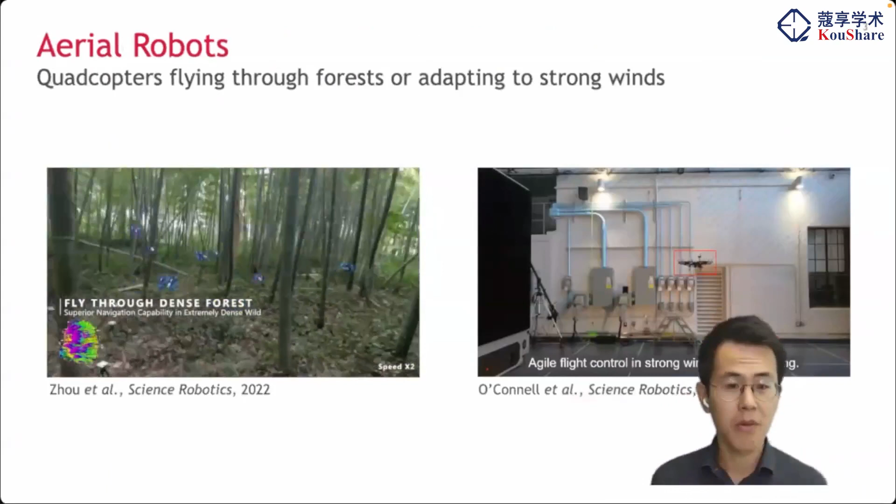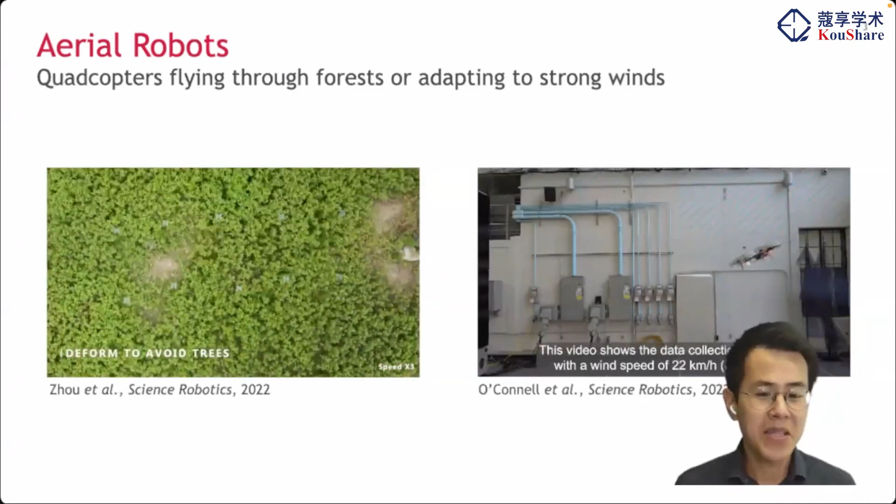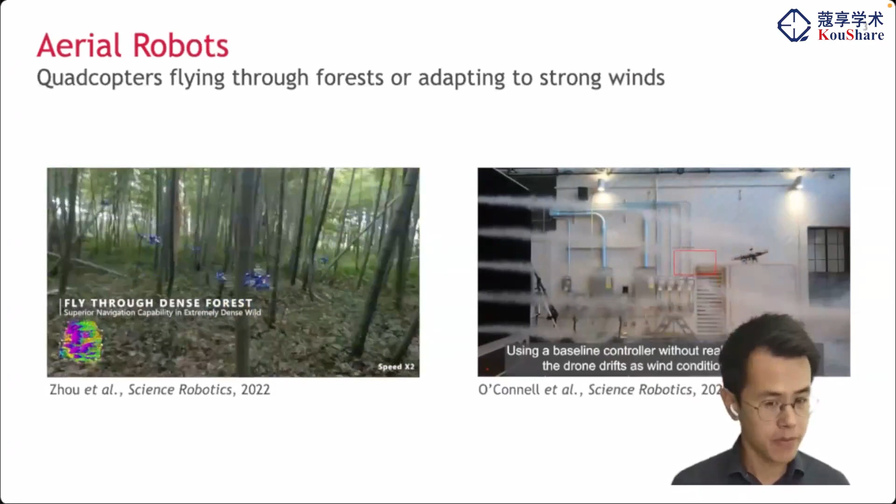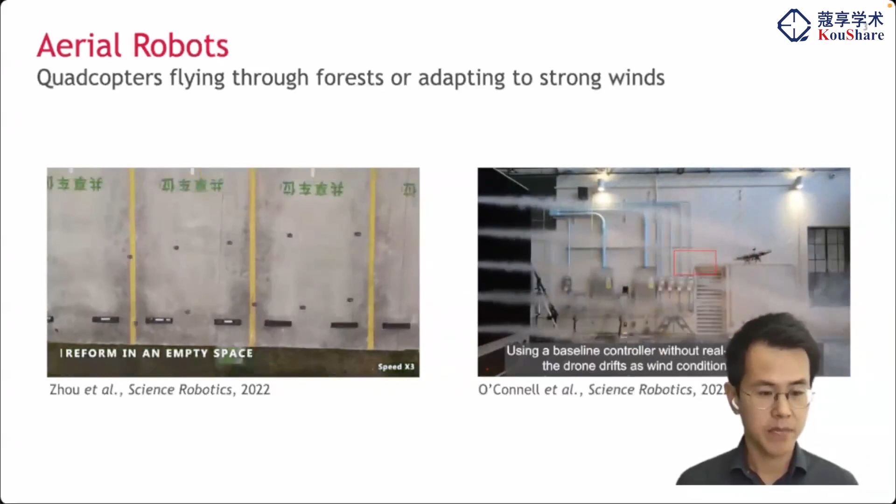Talking about small flying robots, people would typically think of drones or quadrotors, and there are 2 amazing videos here. These robots are basically in the order of a couple hundred grams, with 4 propellers. They're simple in structure, but come with exceptional maneuverability. They can fly and do acrobatic movements, work in swarms flying through dense forest, or learn to fly despite very turbulent disturbances. The capabilities here are state of the art, it's amazing.

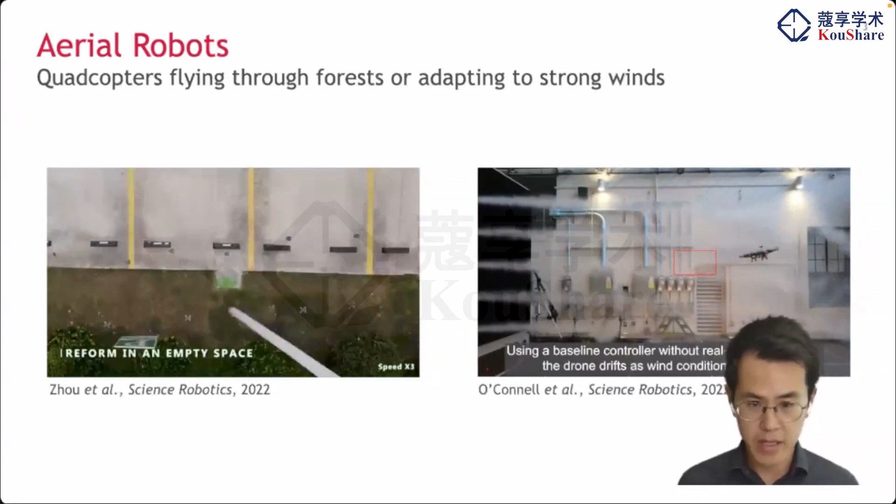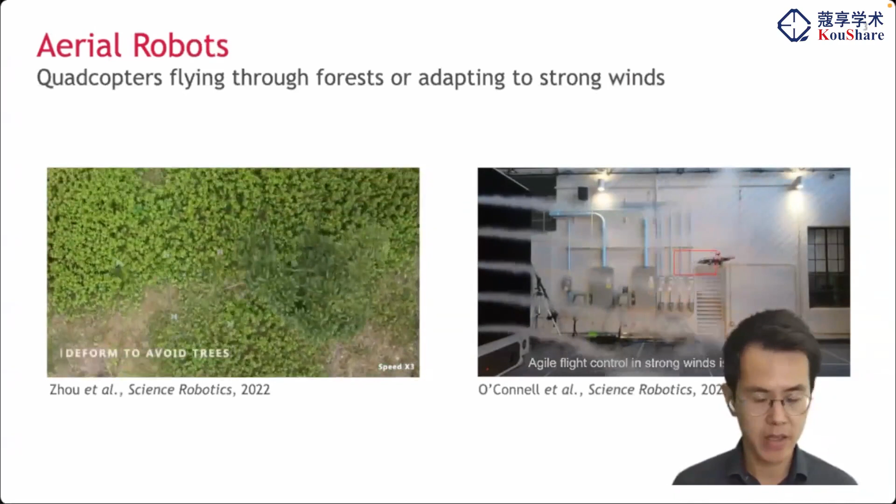But what enables this? It's enabled by intelligence, for example the deep learning algorithms that allow the robot to see, sense, and build a map of its surroundings so it doesn't crash into obstacles. It's also enabled by hardware components: they carry companion computers capable of doing millions of simultaneous computations at any instance, and they also carry cameras and LiDAR sensors for sensing the surrounding environment in real time.

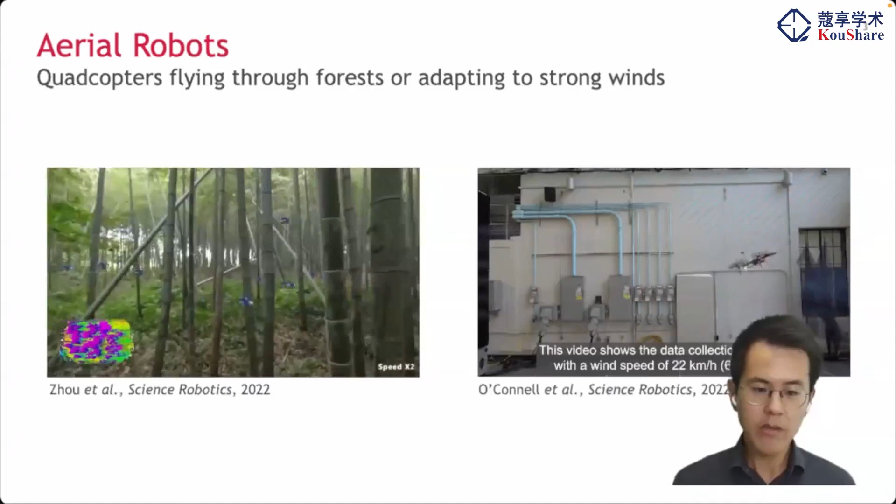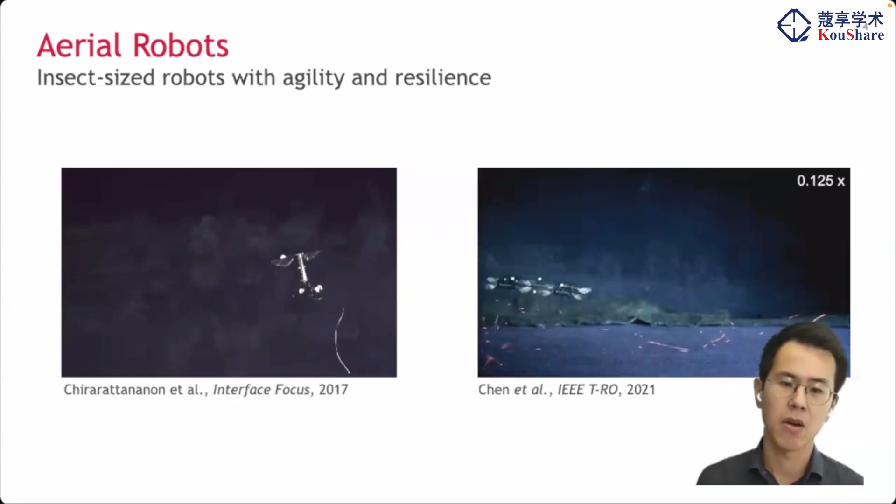Or when it collides with the floor, it doesn't give any destructive damages, right? That comes with the scale. So the reason you see the style differences, the contrast between these two kinds of robots, is actually the size or the scale.

And it comes down to physics of scaling, right? The physics of scaling makes flight actually at small scale much more difficult than at larger scale. Though even at larger scale, flight is already difficult because flying is very expensive, meaning you need to use a lot of energy to create lift and stay aloft in the air.

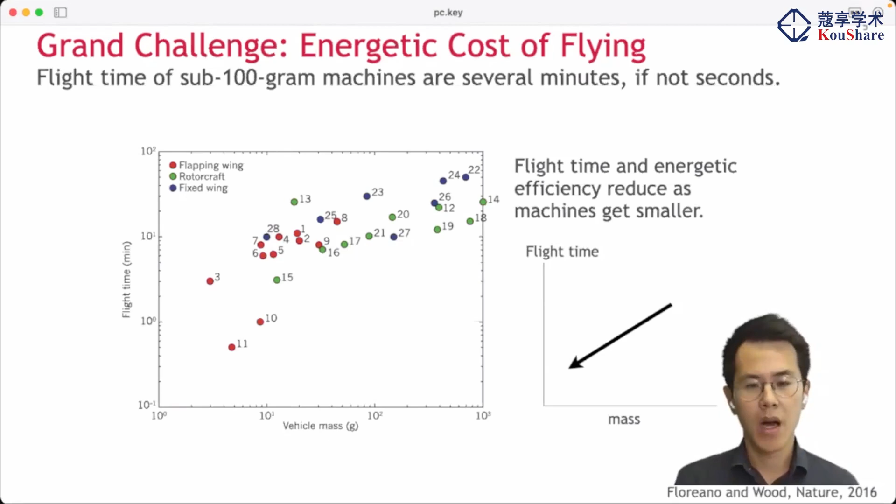So if you look at this plot, I took this from a review paper from Nature in 2016. The plot shows flight times of aerial robots across different scales, from about 10 grams to 1 kilogram. And the trend is very clear: as the mass of the robot gets smaller, the flight time becomes shorter and shorter. This is actually in a log scale, so the effect is very prominent, very pronounced.

Now at smaller scale, it's very difficult to fly. You cannot have much flight time because you cannot generate enough lift, you cannot carry more payload. This is why those small flapping wing robots cannot actually have a battery on board, cannot carry anything, because it's still very difficult to fly them since they're not very efficient.

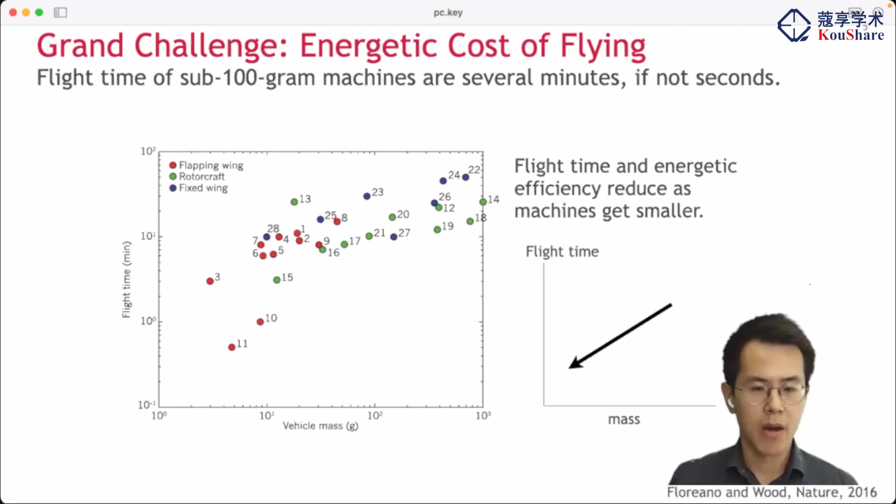So the reason for the effect of scaling can be explained fundamentally from the characteristics of the fluids. Flying is about aerodynamics, about the movement of air, or of the flow. Flight is attained by pushing the air downwards such that the normal force gives you lift, and that keeps the robot in the air. So it's all about aerodynamics, all about flow.

One particular metric that distinguishes aerodynamic flow properties at larger and small scale is Reynolds number. If you've taken a fluid dynamics course, or you're a mechanical engineer or physicist, you'd know that Reynolds number is actually a ratio that captures the importance of inertial forces over viscous forces. The inertial forces I'm talking about is mass times acceleration, and viscous forces is air drag, frictional forces.

It turns out that flow at smaller scale, or low Reynolds numbers, is dominated by viscous forces. So at a smaller scale we have low Reynolds numbers, because the importance of viscous forces becomes the dominant factor over inertial forces, meaning a big proportion of energy is lost in the flow in terms of heat or other losses. This makes flying at small scale difficult, and this is the underlying reason.

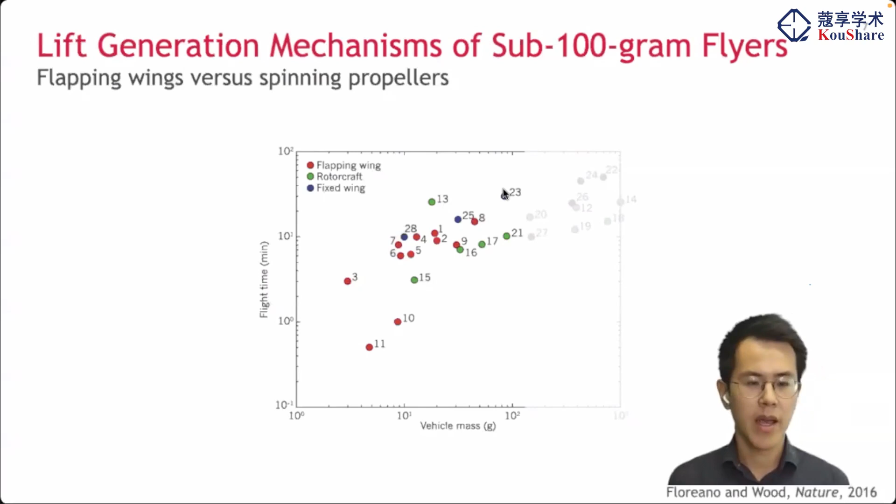I can look at them a little bit more closely and group them as rotorcraft, here in the order of say 30 to 50 grams, and also flapping wing robots. These come from sub-gram size, which is not fully autonomous, to 20 or 30 grams, which is autonomous. What's very obvious here is that flapping wing robots sit on top of rotorcraft, meaning they have longer flight time than rotorcraft when we compare vehicles at the same mass.

One thing you want to notice is also the size. Despite having the same mass, the same weight, for example a rotorcraft that is 30 grams might have a vehicle span of about 10 centimeters, but a flapping wing robot that is about 20 or 30 grams might be about 30 or 40 centimeters in span. So these are two different things, coming from different propulsion mechanisms as you can see.

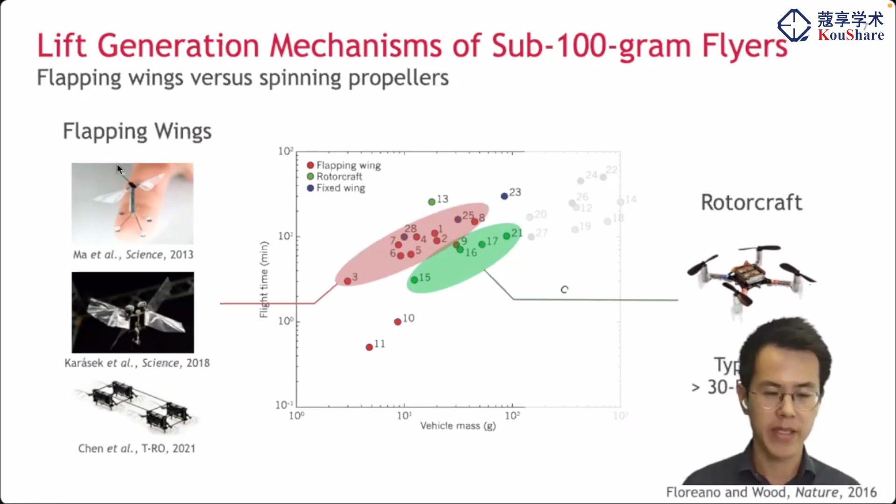So in order to understand this, it comes down to two things. The main differences are due to two reasons: the first is called unsteady aerodynamics, and the second is called disc loading. First, I'm going to talk about unsteady aerodynamics - what does it mean?

So a mechanism for lift generation of flapping wings is created by flapping the wing back and forth, as you can see in the video. This is the mechanism used by insects, and maybe birds, but birds are a little bit different.

So in 1999, Dickinson and Sanjay Sane published a paper about using a scaled up dynamic model to make a huge flapping wing, flapping it not in air but in some liquid to match the Reynolds number, and study the force generated by flapping wings. They found something very interesting, and I'm not going to go into the details, but let me give you some examples.

When we look at regular fixed wing aircraft or propeller blades, the propellers or the wing, sometimes called airfoils, operate going through the air at a very shallow, small angle of attack, meaning the angle between the wing and the moving direction is actually small, on the order of 10 to 20 degrees. On the other hand, when the flapping wing goes through the air, the angle of the wing with respect to the motion is huge, between 45 to 90 degrees even.

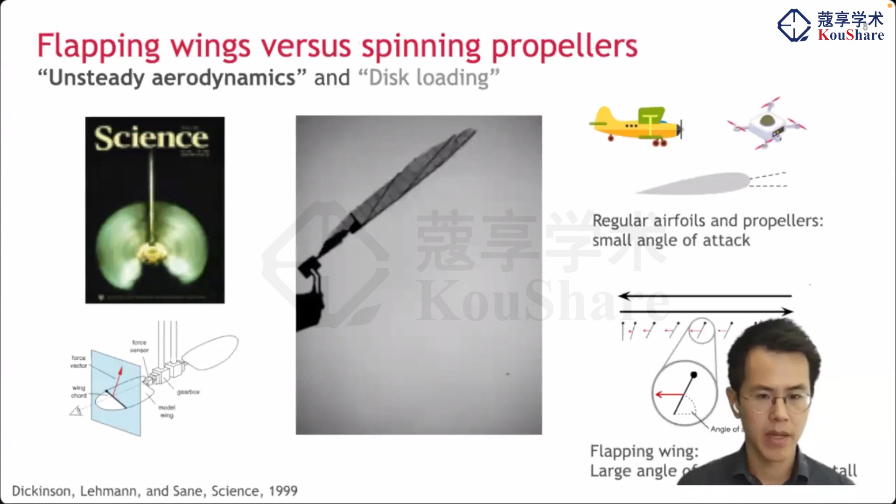Another thing I mentioned is disk loading. If I want to explain what it is and why it matters, I have to first define something called power loading. Power loading is a ratio of lift to power, so it's a direct metric for efficiency. High power loading means you need lower power to generate the same amount of lift, so high power loading means you are more efficient in actually generating lift.

Now according to momentum theory, which is a very simplified theory that can be used to describe flapping wings, propellers, spinning wings, and everything - however it's also a little bit simplified so it doesn't include the scaling effect - you can use this to compare different lift generation mechanisms at the same scale, meaning the same magnitude of lift, for example. According to momentum theory, power loading is proportional to the inverse of the square root of disk loading. Disk loading is the size of the wing or propeller, the area of the wing or propeller - it's the lift relative to the size of the wing.

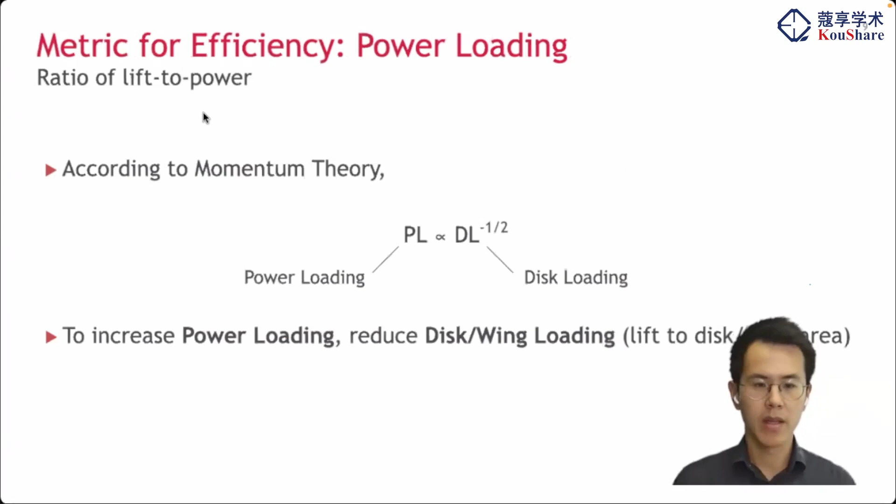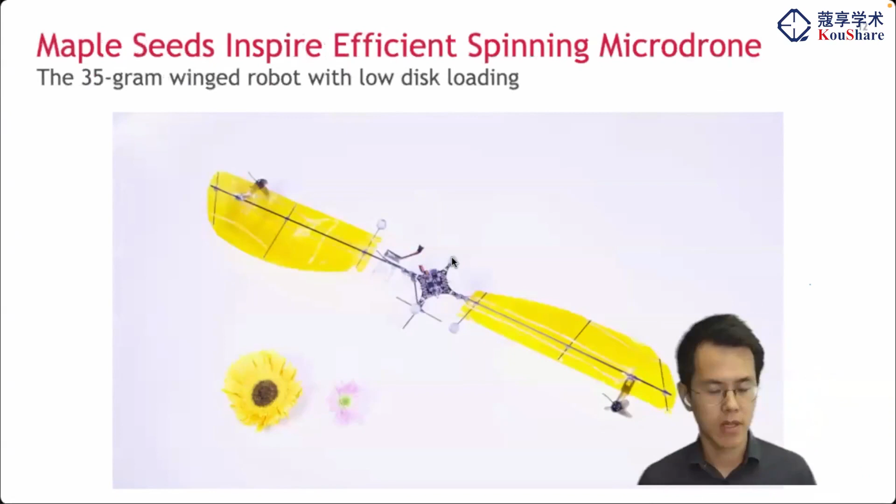So putting two and two together, we decided we can probably create a really efficient robot that can fly. And this is the robot that you saw in the first slide, and this is what we created. This is why we say this robot is inspired by maple seeds, or Japanese maple seeds, or samaras. So this robot is 35 grams. It has 2 wings - wings are the main lift generating mechanism.

Now, the fact that it's only 35 grams - the wingspan, the span of the robot, is actually huge. It's more than 60 centimeters, about 60 centimeters, because the wings are huge. The wings are huge because we want to reduce the disk loading, the wing loading.

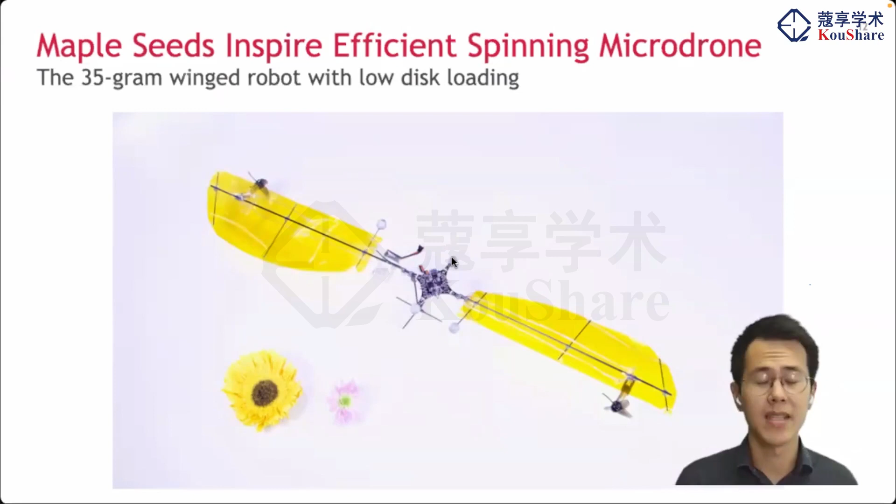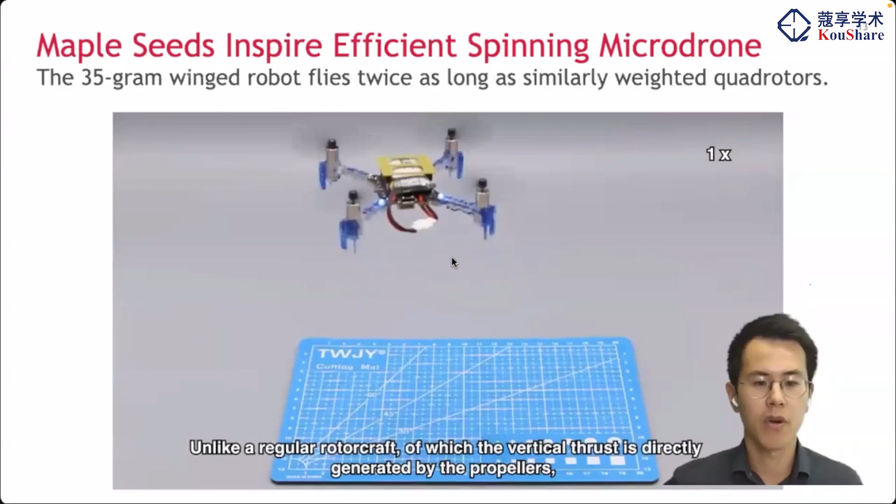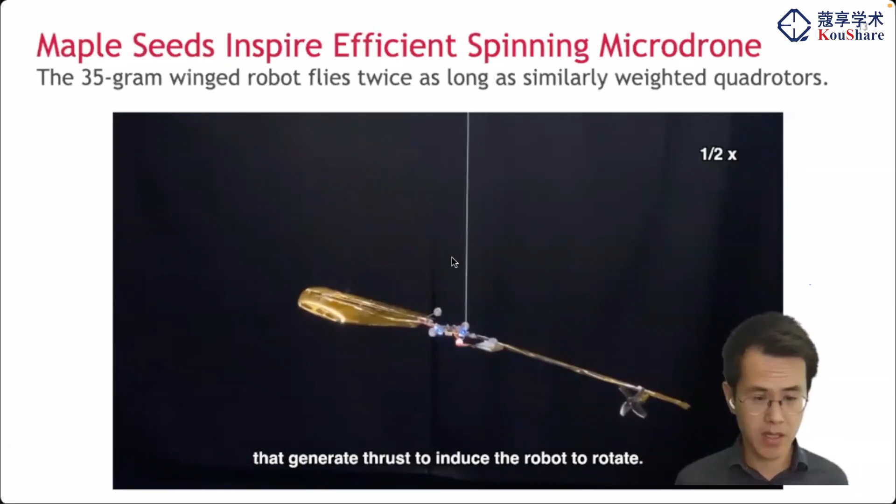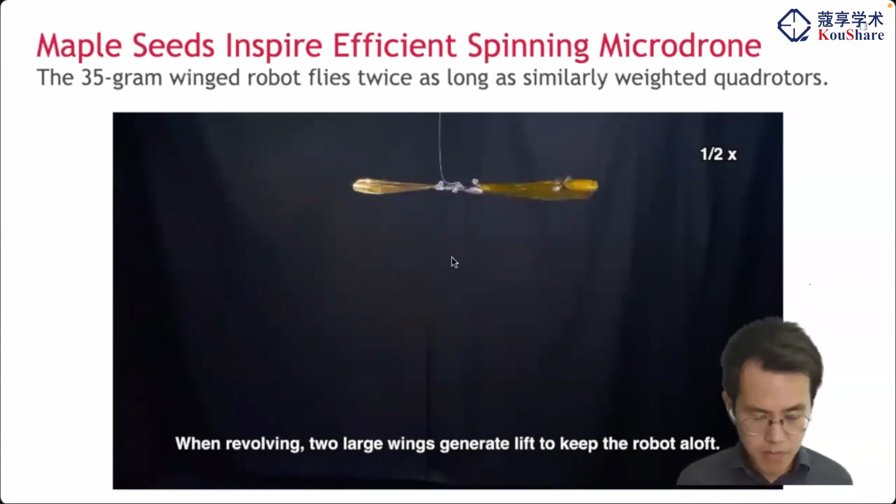So to give you a highlight, this robot - this is the video of how it flies, in slow motion. What you can see here is basically a pair of wings that is spinning. So this samara robot doesn't work like a quadrotor, because a quadcopter typically uses 4 propellers pointing upright to generate lift directly. Our samara robot has 2 propellers, but they're pointing horizontally. Their role is for generating rotation. And with the wing rotation, we actually use the wings to keep the robot aloft to generate lift. This is how it works, which is of course slightly different from quadcopters.

So in a little bit more detail - I'm not going to be too technical, but I want to re-emphasize the importance of power loading. So for this robot, if we want to make it very efficient, we look at this metric, power loading, meaning we look at the amount of lift the robot can generate over input power. And when we talk about input power, we're talking about electrical input power that goes into the motors, into the motors that drive the propellers.

Lift is proportional to the square of how fast the robot is spinning, a quadratic function with some coefficient that depends on the size and geometry of the wings. Electrical power is basically the current consumed by the motor and the voltage that drives the motor. So what we want to do is maximize this power loading.

A little more closely, how it works: when you supply voltage to the motors, the propellers spin and generate thrust force, which gives the robot yaw torque to rotate. This yaw torque rotation, generated by the propellers, overcomes the drag torque created by the spinning wings, which is also proportional to the square of the rotational speed, omega. So we have to balance the drag torque generated by the wings with the thrust generated by the propeller. Everything depends on the wing profiles, characterized by the variables CT and CQ.

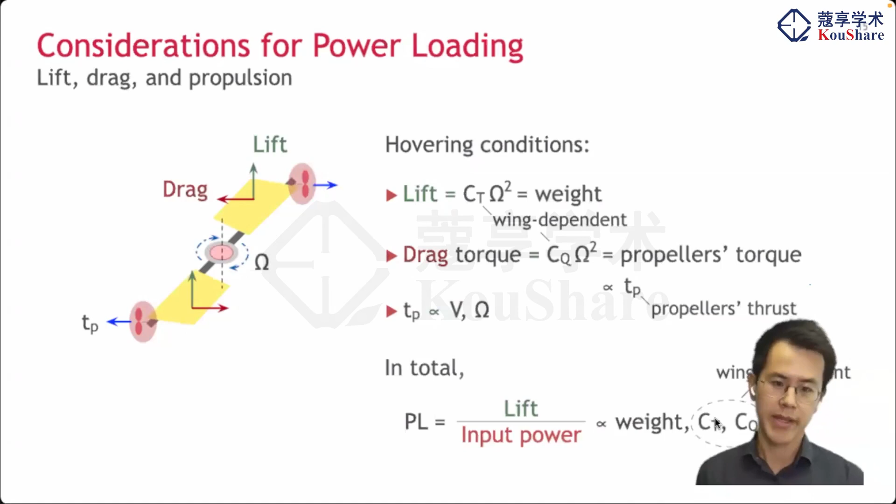So in total, if we want to maximize the lift power, we have to consider the factors CT and CQ, which are dependent on the wings. We want to optimize and maximize this power loading. To do that, we created a physical model with parameters that we don't know, which have to be fitted experimentally.

To do that, we tried out different wing profiles to find physical parameters that would fit the model. The model is physics-based, not involving deep learning and stuff, because we actually have a pretty good idea of what's going on physically in flight.

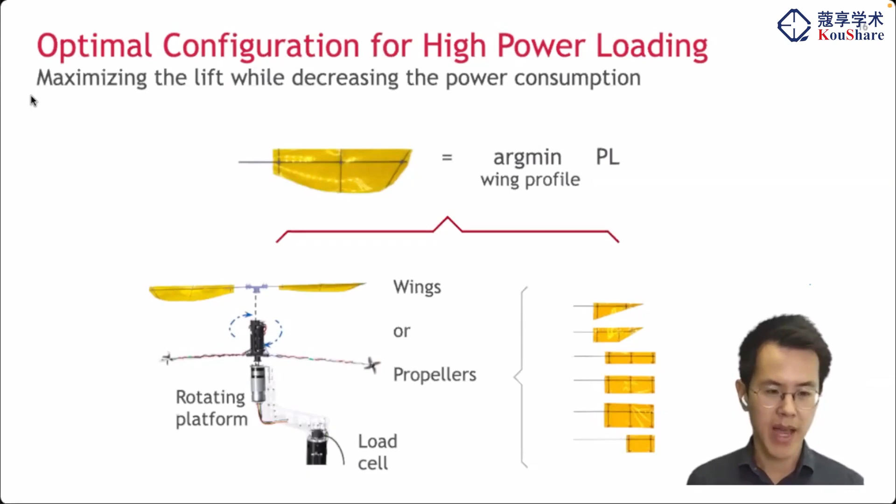So we use a physics-based model to optimize the robot, and with the optimized configuration, it turns out the power loading of the robot is about twice as high as a regular rotorcraft of the same size. This is because, in a simplistic sense, it has large revolving wings.

With the first version of the robot that we optimized, it comes with a small battery, 35 grams in weight, and can hover for 15 minutes. If we use a slightly larger battery, the robot becomes 42 grams, but it can fly for 24 minutes.

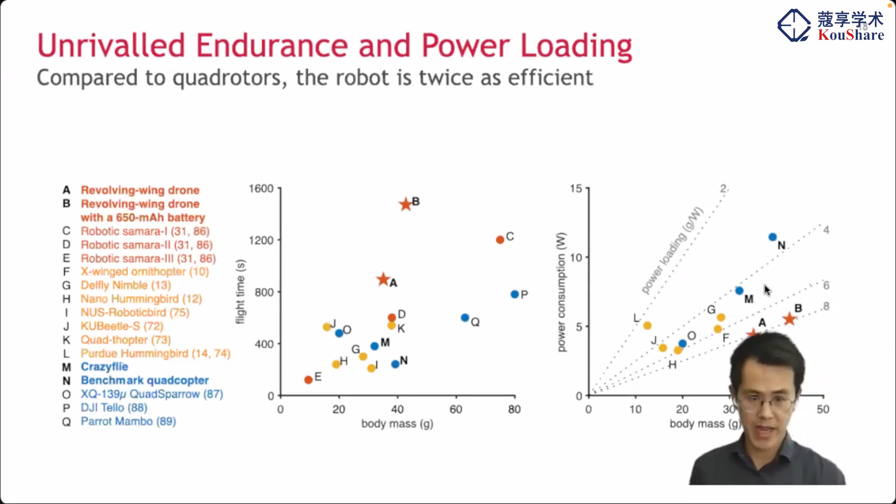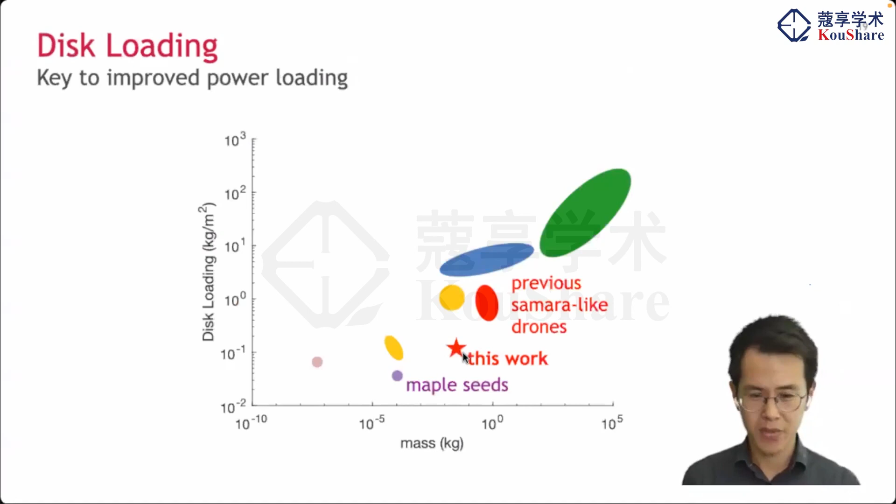Now we can have a robot that can fly and last very long. Just for completion, this work, our robot, compared to flapping wing robots, also has much higher power loading, which is one of the key reasons why the robot is more efficient.

So with the robot that is able to fly, we still want to make sure it can function, meaning we should be able to place the robot anywhere we want it to be, i.e. do position control. This turns out to be not overly complicated, but not straightforward either, because how this robot flies is different from other flying robots people are used to, such as quadcopters or flapping wing robots, which generate lift by spinning propellers or flapping wings.

Their thrust vector is always vertical with respect to the robot body. So in order to accelerate sideways, what they do is they change their orientation. They generate torque to change their orientation, so they have a horizontal acceleration component in the horizontal direction.

Now, our revolving wing robots, turns out we don't actually have to do that. Why? Imagine when the robot is hovering, two propellers will be generating the same force to keep a constant rotation. Now suppose we'd like the robot to go right. What we could do is, since the robot is rotating, at the moment when it's in a certain orientation, you can increase the force of the upper propeller and reduce the force of the lower propeller. That doesn't change the spinning torque, but it will create an unbalanced force that moves the robot to the right-hand side.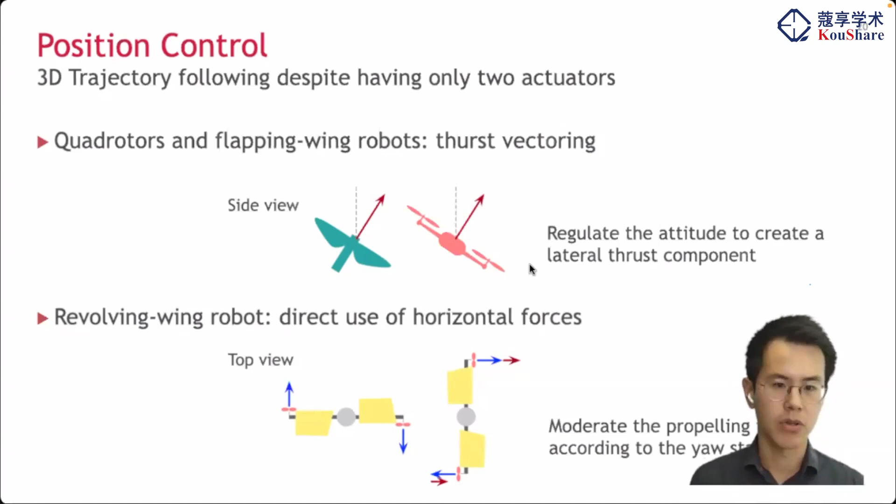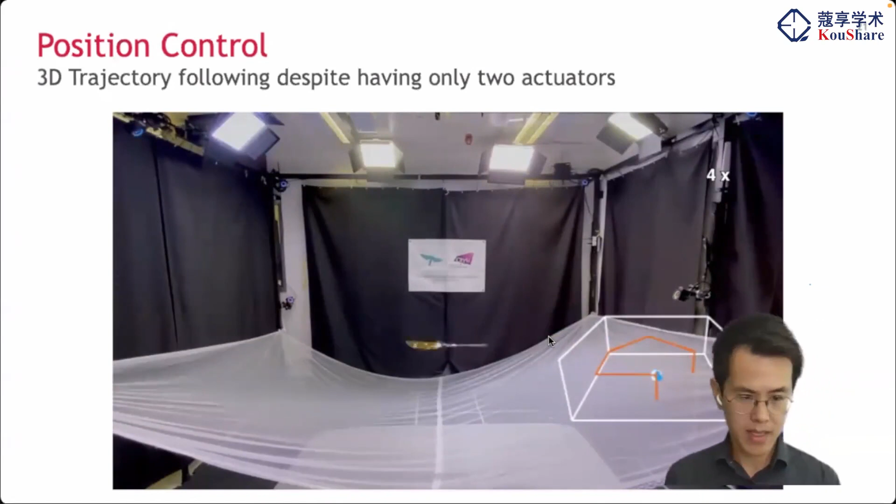So we can use this horizontal force to actually control the position of the robot directly. As a result, we could do, for example, trajectory following flight. I'm not going to lie that the precision and accuracy is not going to be as good as a quadrotor, because we still need to use the fact that the robot is rotating, and we have to time the force at the right moment in order to move the robot. But it can actually realize the desired trajectory rather well.

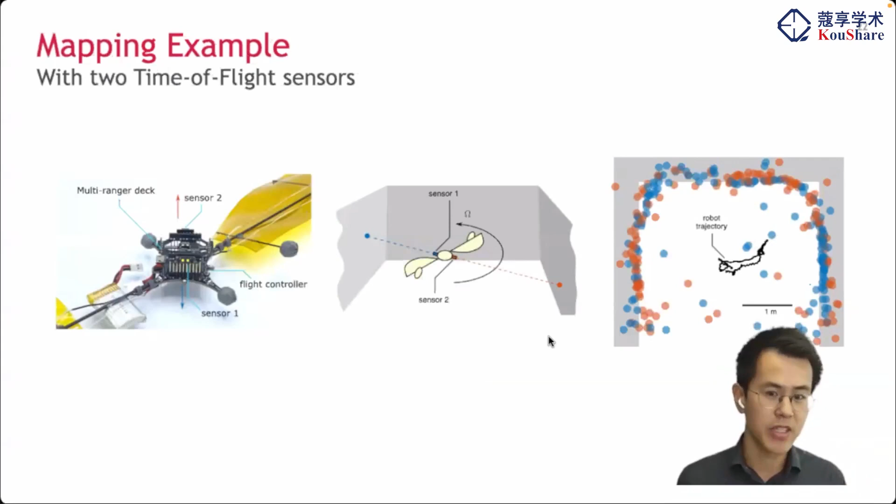Another example we showed in the paper is that we can use the constant rotation of the robot to our advantage. If we put time-of-flight sensors or a laser rangefinder into the robot, we can use the fact that it's constantly spinning to create a map of the surroundings, with the laser sensing the distance to the wall in different directions around the robot. This works the same way as a LiDAR sensor used on autonomous driving cars, because a regular LiDAR sensor has to be put on a rotating stage to get 3D information. In this case, our robot is actually the rotating stage already.

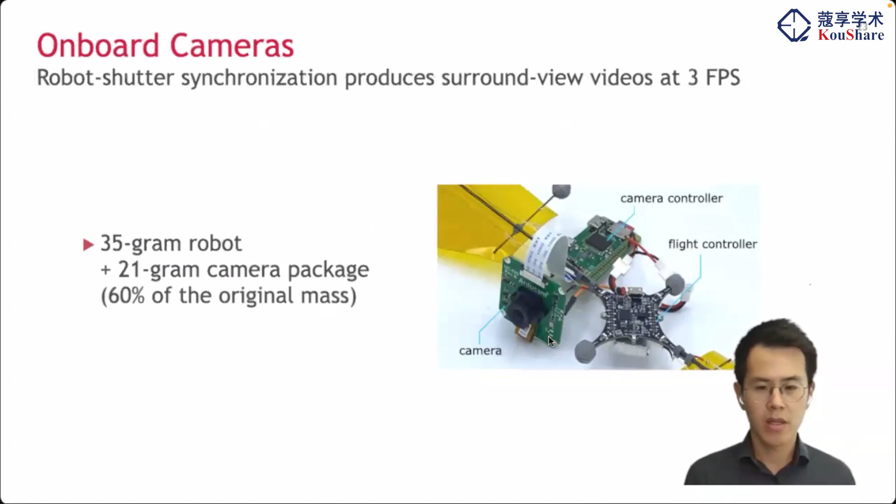Since our robot is extremely efficient, it can also carry an insane amount of payload. For example, the 35-gram robot can carry a 21-gram camera package on top of that. Honestly, this camera package is not efficient at all, it's really heavy, but the point is our robot can carry it. So with a camera being carried by the robot, we could time the shutter, synchronizing it with the rotation to get 4 different views at the same time to construct a low frame rate video, for example.

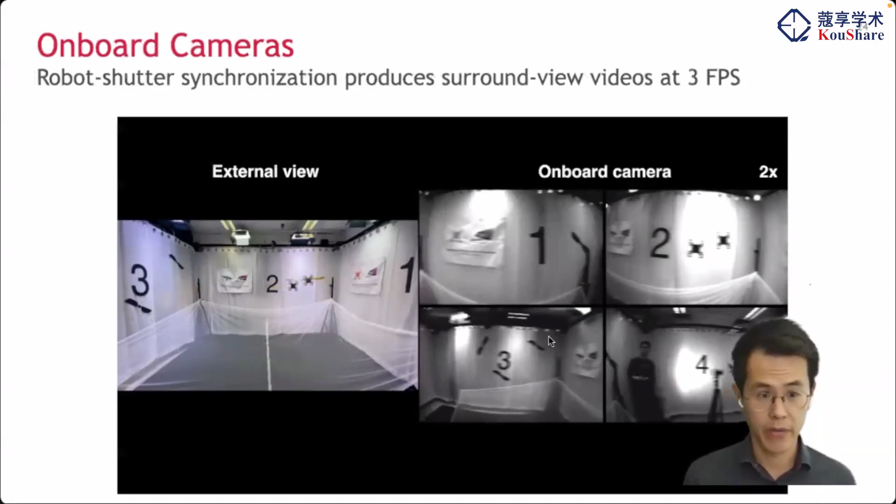This is one possibility, to show that despite the robot rotating, it can still be useful depending on what you would like to do with it.

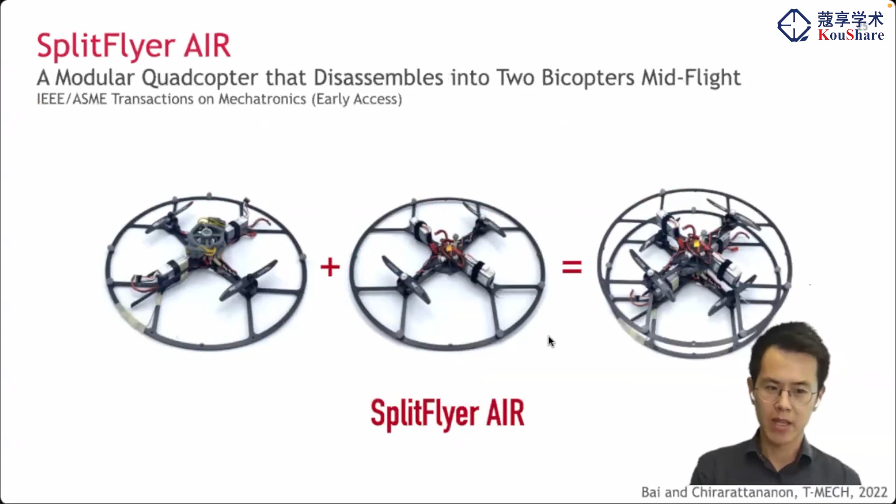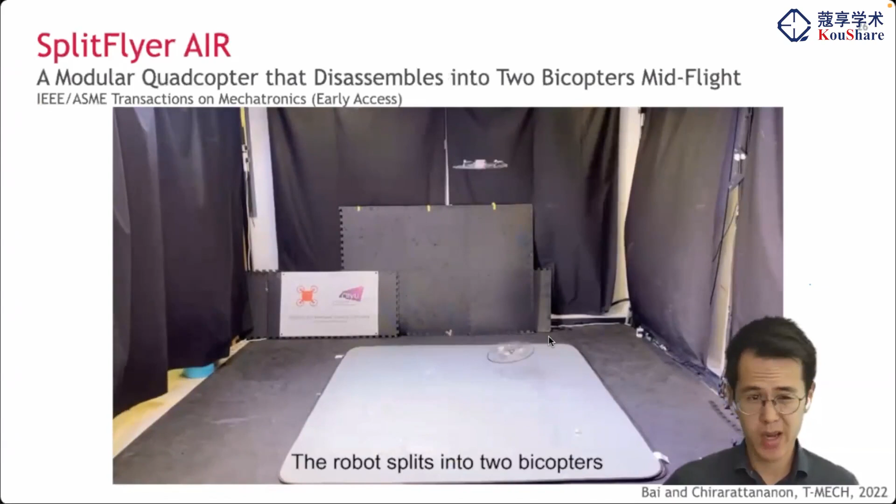I'm actually running out of time here, so I'm just going to show you one spin-off project from what we learned in this work. We also created, for example, a quadcopter that splits mid-air during flight and becomes 2 bicopters that can be independently controlled. I'm going to go through this very quickly.

Since I don't have time, I'm going to skip a few slides. The idea is that our research team is interested in maximizing the functionalities of small robots that are limited by weight or power. So we want to do more.